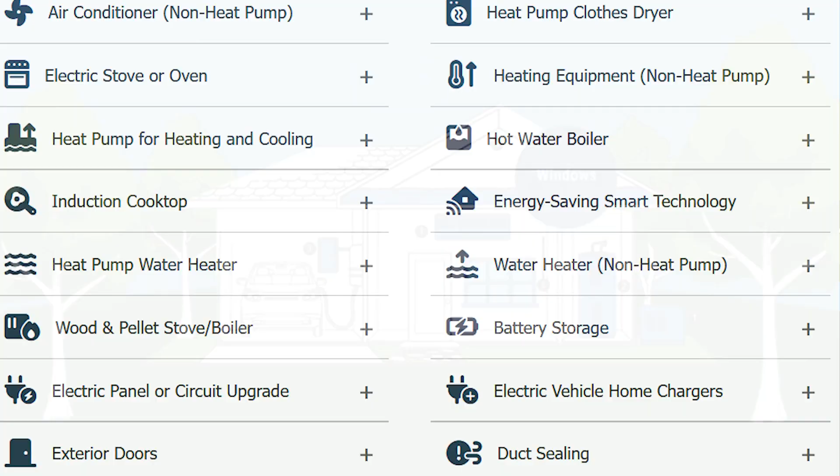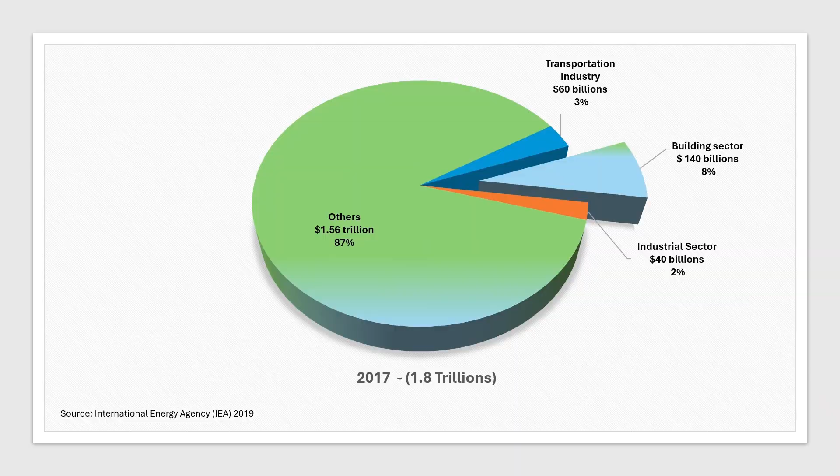The U.S. Congress allocated over $1 trillion to energize the renewable energy industry by investing in energy supply chains, emissions reduction, consumer energy savings, and clean energy jobs. This is in addition to the $1.8 trillion passed in 2017 as part of the Clean Energy for America Act. A sizable amount of these two massive budgets is allocated towards energy efficiency in the residential and small business sectors.

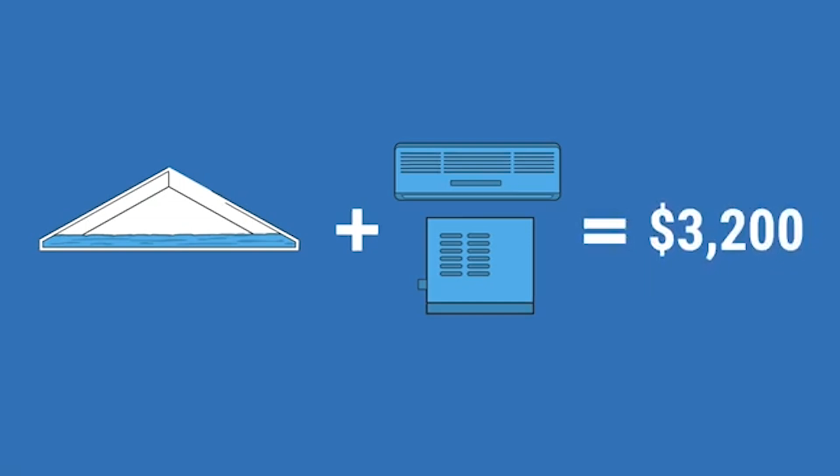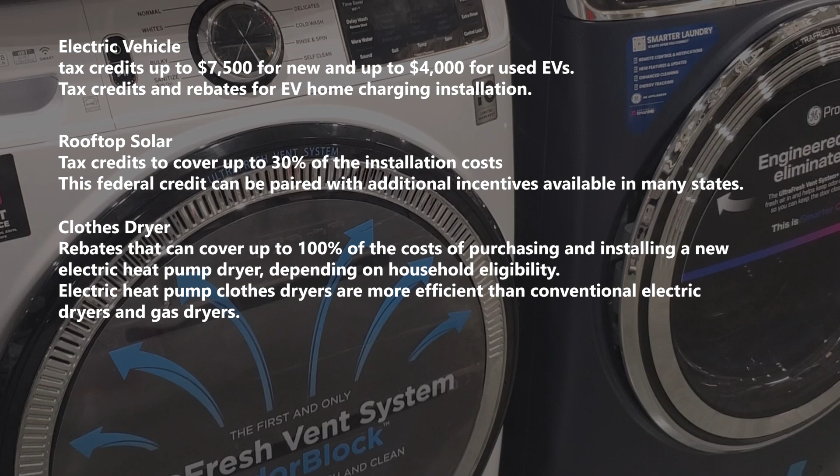Some of the incentives include tax credits of up to $7,500 for new and up to $4,000 for used electric vehicles, as well as incentives for installation of home charging units. Tax credits to cover up to 30% of solar panel installation costs. Rebates that can cover up to 100% of the cost of purchasing and installing a new electric heat pump dryer. These units are more efficient than conventional electric dryers and gas dryers.

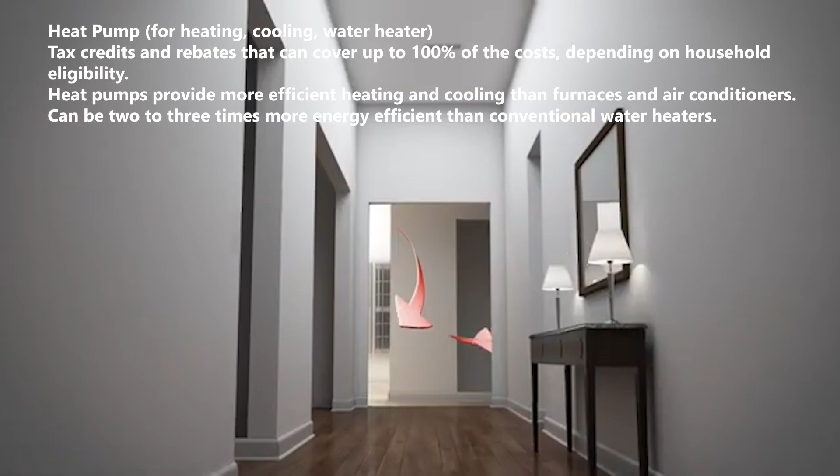Rebates that can cover up to 100% of the cost of electric stoves, cooktops, ranges, and ovens, as well as tax credits and rebates to cover the cost of heat pumps for heating and cooling and water heaters. Heat pumps provide more efficient heating and cooling than furnaces and air conditioners. They are also 2 to 3 times more energy efficient than conventional water heaters.

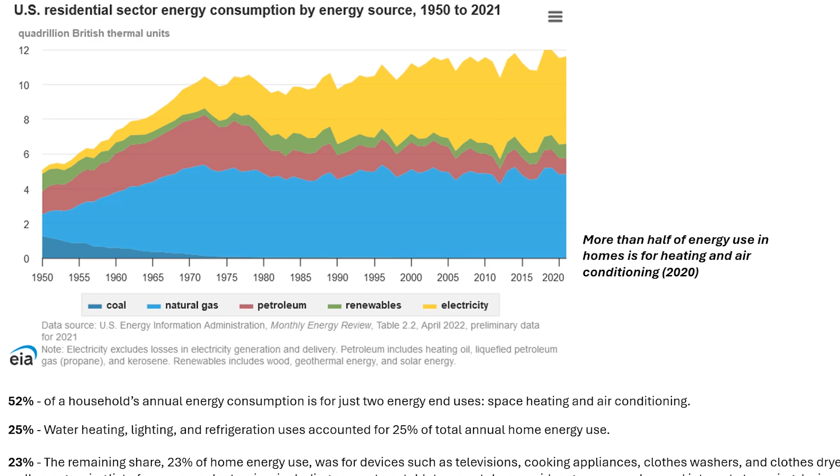Additional incentives include up to 30% credit for the purchase and installation costs of solar water heaters, battery storage systems, small wind turbines, and geothermal heat pumps. According to a 2022 report by the Energy Information Administration, more than half of energy use in the residential sector is for heating and air conditioning. Therefore, the focus of this video will be on achieving energy efficiency in the heating and cooling of our homes and saving on our utility bills.

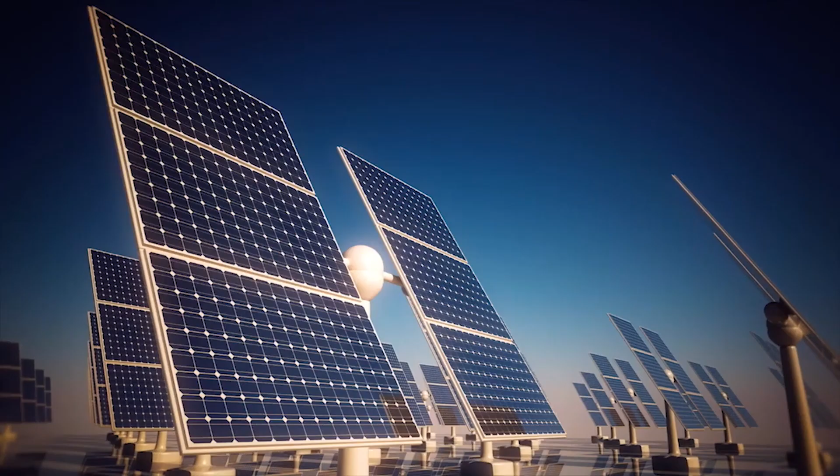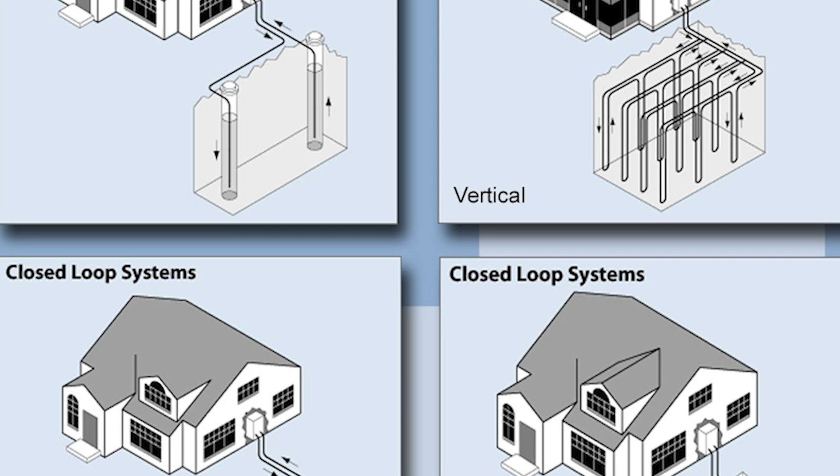This can be accomplished in 2 different ways: passive solar design and active solar design. Active solar design requires large upfront costs such as solar panels, geothermal heat pumps, and small-scale wind turbines, and we will cover this section in our upcoming video. This video will focus on achieving energy efficiency with minimal upfront costs using a method known as passive solar design. This method is implemented using some basic knowledge of earth science combined with time-tested techniques and affordable products. The upfront cost is low, and the impact is immediate and long-lasting.

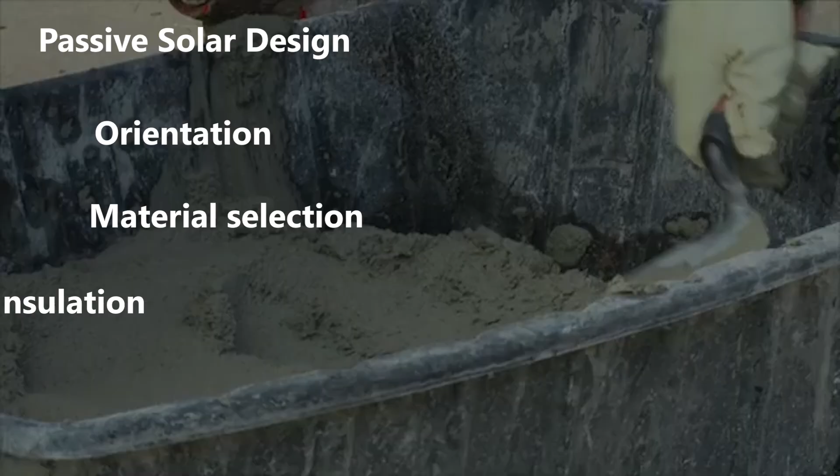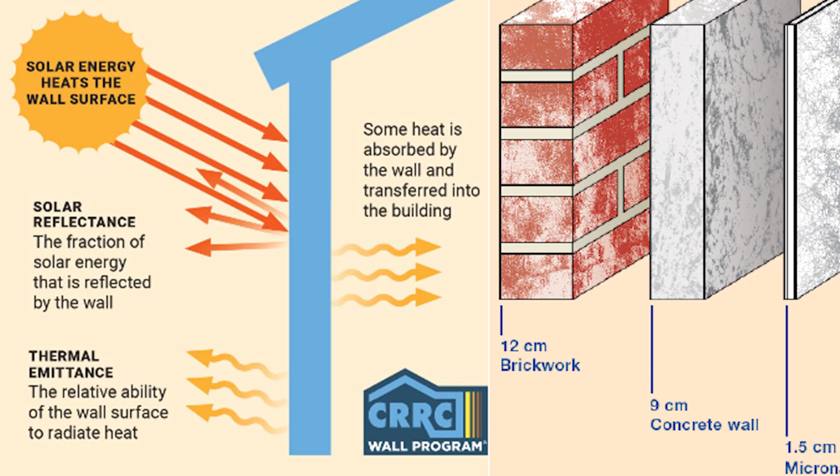Passive solar design incorporates building orientation, material selection, insulation, and weatherization methods to reduce energy consumption and keep our homes and businesses warmer in the winter and cooler in the summer. During the summer seasons, our efforts are concentrated on blocking the sun's energy to keep our homes cool. This is known as passive solar cooling.

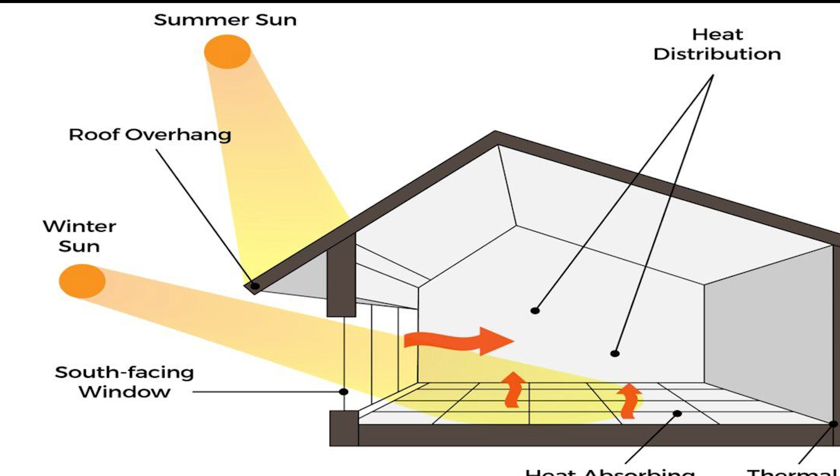One of the simplest, most affordable, and most effective ways of accomplishing the task is using overhangs. Since the sun's path follows a high arc during summer, roof overhangs are very effective in blocking the sun's rays. During winter, when the sun's heat is needed, overhangs do not pose a problem since the sun follows a lower arc path, so natural light and heat can reach our homes. Blinds are also another simple and time-tested product that contribute to a more regulated interior temperature.

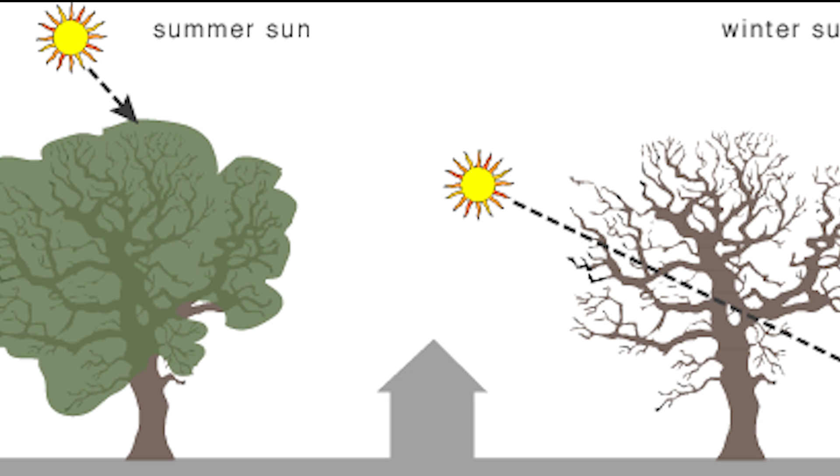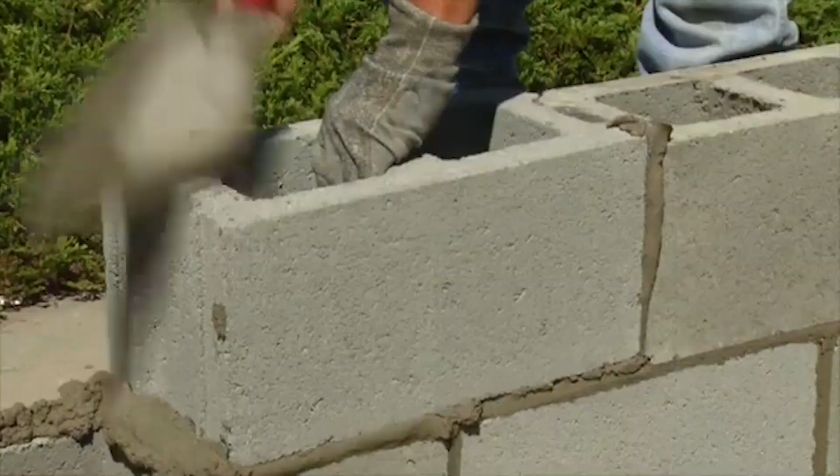Finally, trees and plants that thrive in summer and lose their leaves in winter are a great addition to the energy savings package. They block out direct sunlight in the warmer months while allowing sunlight to reach our homes in winter. It's a smart choice for boosting both energy efficiency and visual appeal. The most passively effective means of keeping our homes cool during hot summer days is by using the right building materials during new construction or when modifying existing buildings.

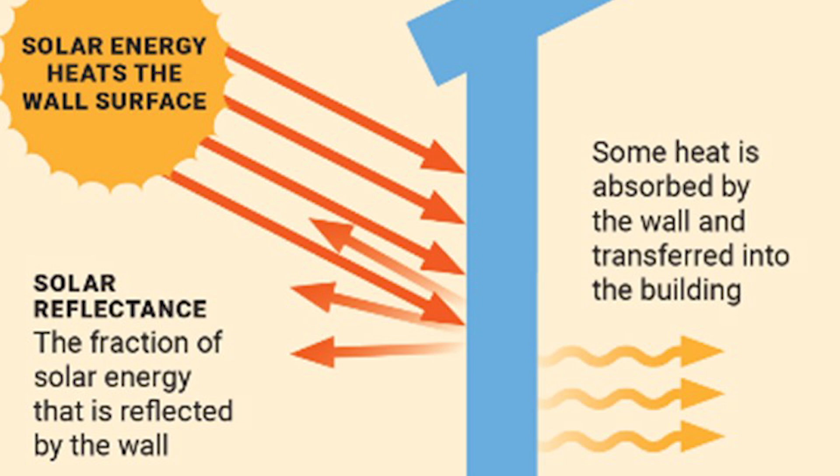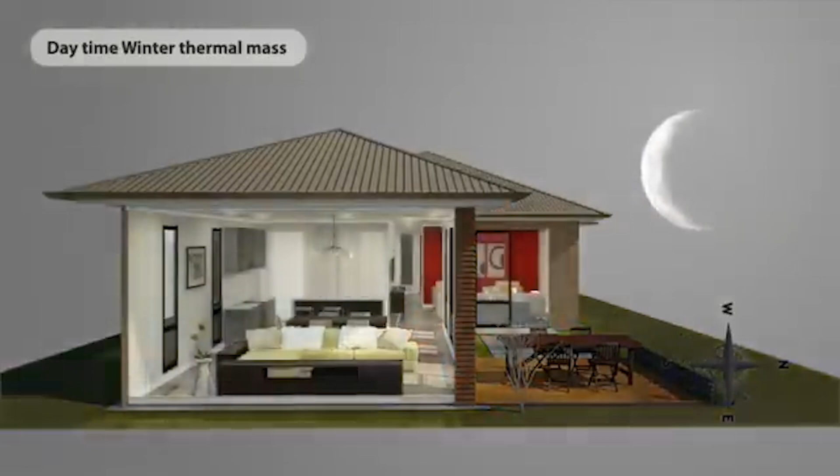Building materials with high thermal mass, which is the capacity to absorb energy, contribute to a cooler interior temperature because they absorb the sun's energy rather than transferring it to the interior. The absorbed energy is eventually released into the interior hours later in the evening or at night, providing a warmer interior when temperatures would have dropped. These building materials help us regulate interior temperature by keeping it cool during the day and warm in the evening when needed.

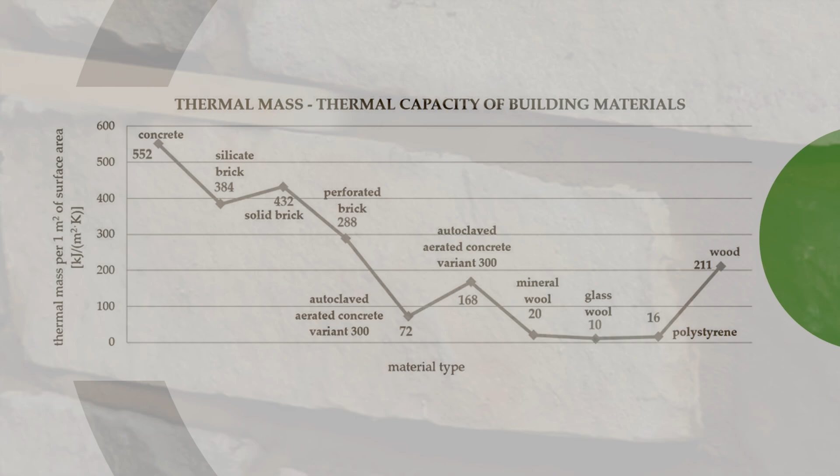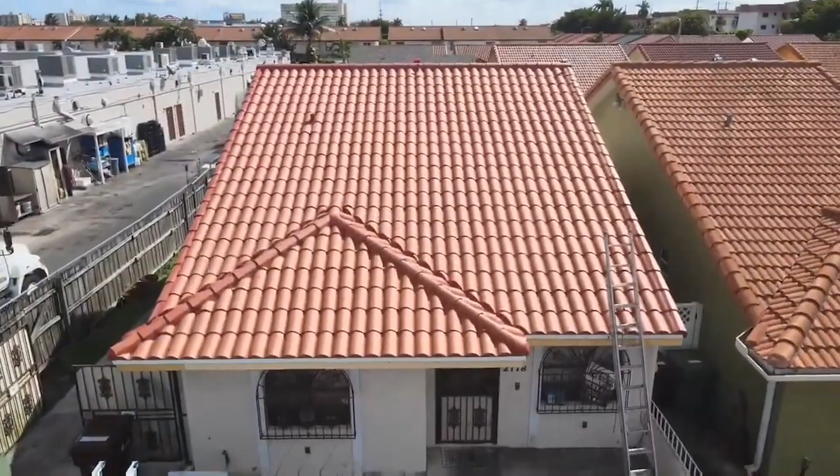Thermal mass is formulated using heat capacity and density. Heat capacity is the amount of heat energy required to change the temperature of an object. For example, it takes a lot of heat energy to change the temperature of concrete or clay compared to metal. Therefore, building blocks made from concrete or clay have higher heat capacity than metal and are more desirable for passive solar design. In addition, their compact mass or density allows them to absorb much of the incoming heat.

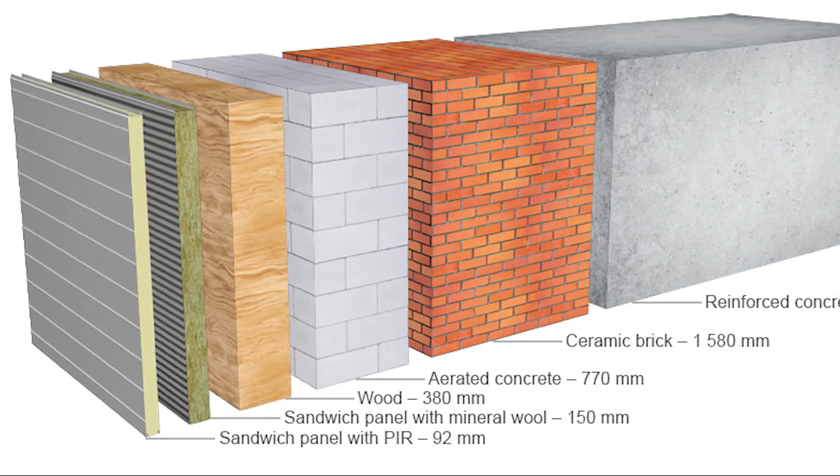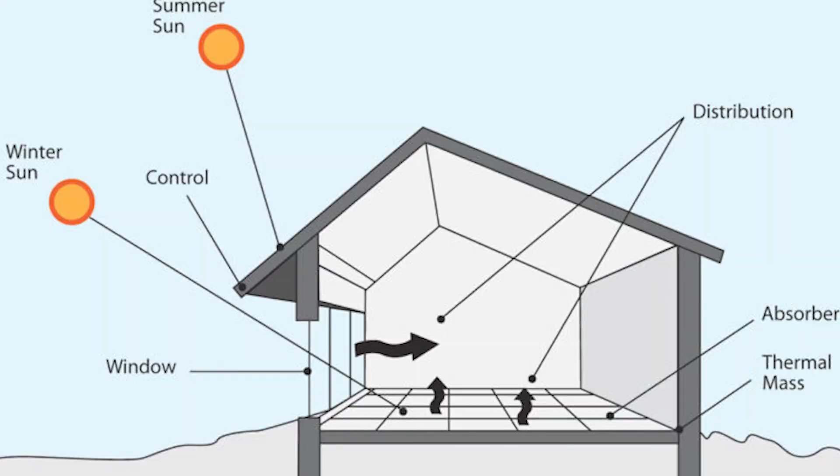These materials are costly, so they are normally applied during new construction. However, they can be applied for flooring of existing buildings at a more reasonable cost for energy efficiency. When the sun's energy enters a living space through doors or windows, the energy strikes the floor at an angle. Depending on the floor material, the energy will either be absorbed or dispersed into the home.

Tiles made of earthy material, such as clay or concrete, are the preferred choices because they have an excellent thermal mass and can absorb the heat that enters the home and help keep the space cool during the day. The absorbed heat is gradually released during the evening when most needed. Building materials for passive solar design are ranked according to their thermal mass. The higher the ranking, the more desirable the material.

Material selection is a method that has been passed down for generations. For centuries, many cultures around the world have used materials with high thermal mass, mainly earthy materials, for similar cooling purposes.

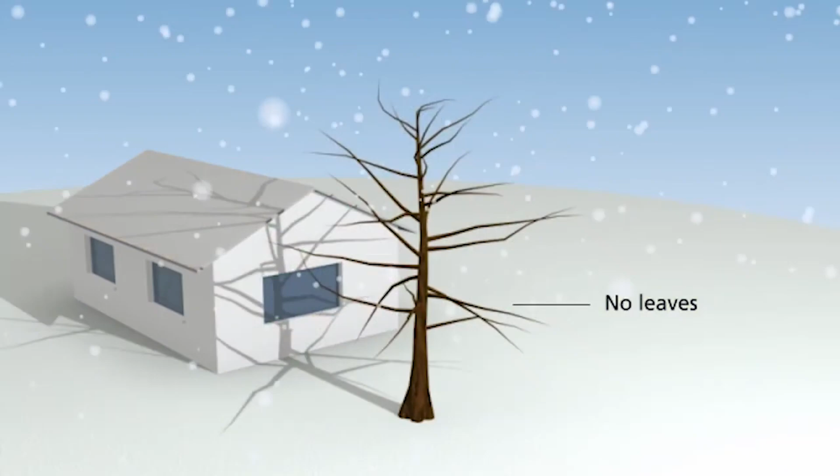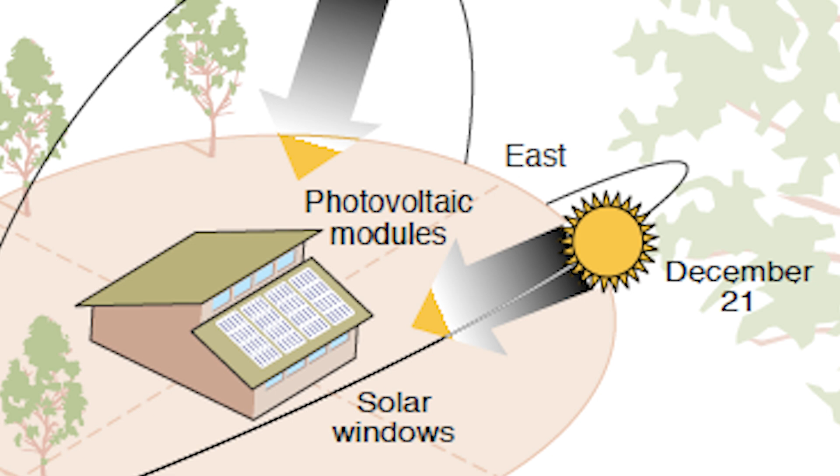Winter brings its own set of challenges. This time, the goal for energy efficiency is to allow as much of the sun's energy as possible into our homes. This is accomplished using passive solar heating, which is a method of orienting openings, such as doors, windows, and skylights, to face the sun. Homes reoriented toward the sun have proven to save between 10% and 20%, and the IRA provides tax breaks and rebates for upgrades of exterior windows, doors, and skylights.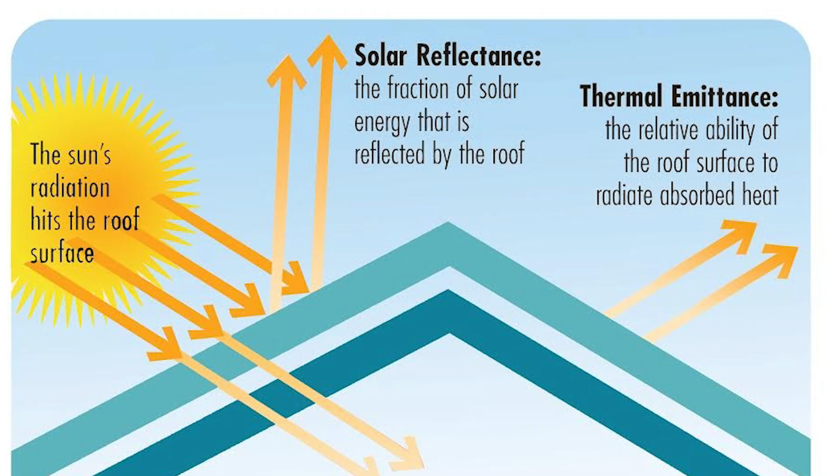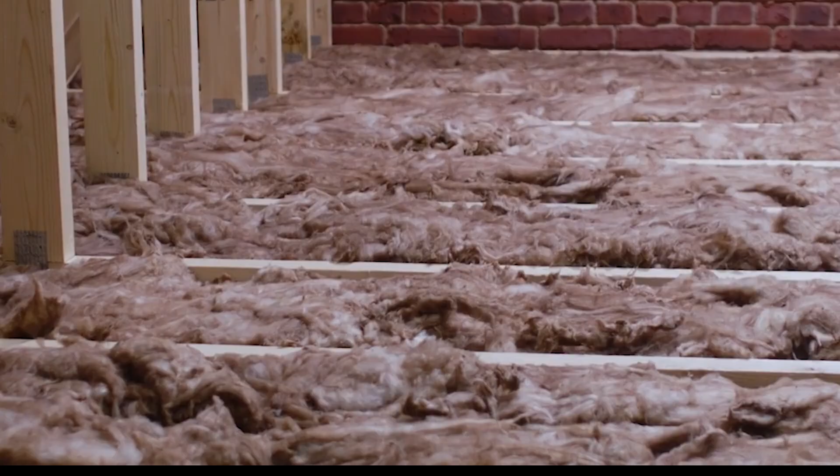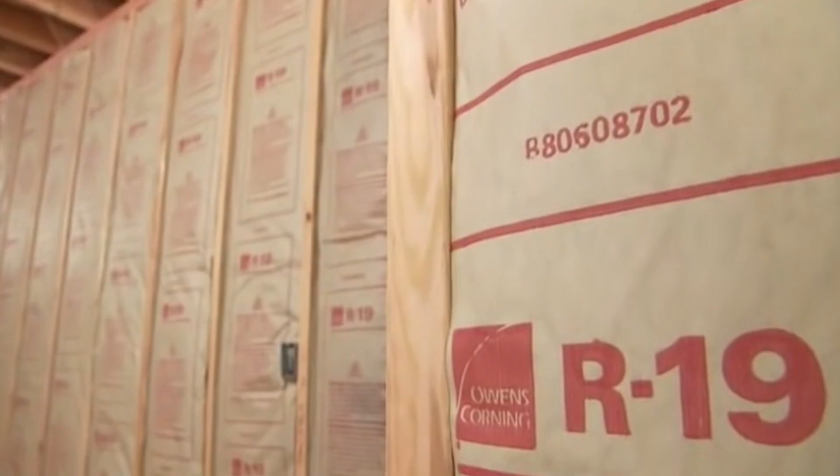Once passive solar design is implemented, the next task is to limit the amount of heat that flows in and out of the home and keep the indoor temperature as consistent as possible. This is accomplished using insulation, which helps reduce heating and cooling costs. Insulation can be applied either during new construction or on existing buildings. Insulation levels are specified by the R value, which is a measure of the insulation's ability to resist heat flow. The higher the R value, the better the thermal performance.

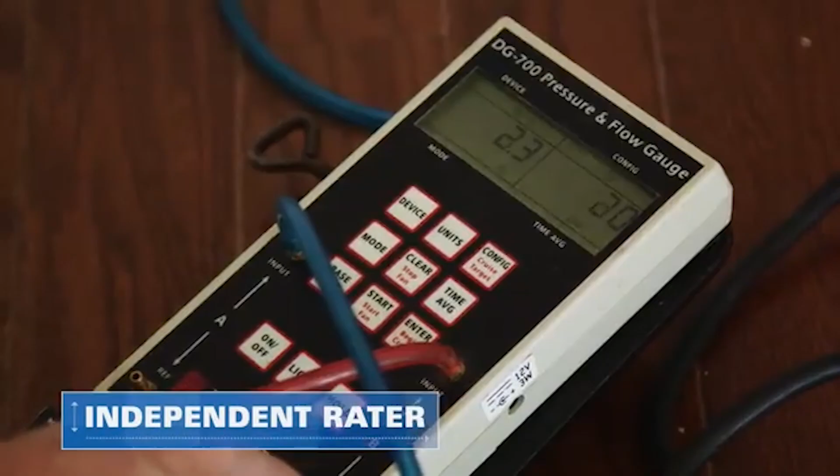Finally, detecting and measuring air leakage is the last step to an energy-efficient home. Air leakage occurs when outside air enters, and interior heated or air-conditioned air leaves the home through cracks and openings. Detection can be accomplished visually or with measuring devices.

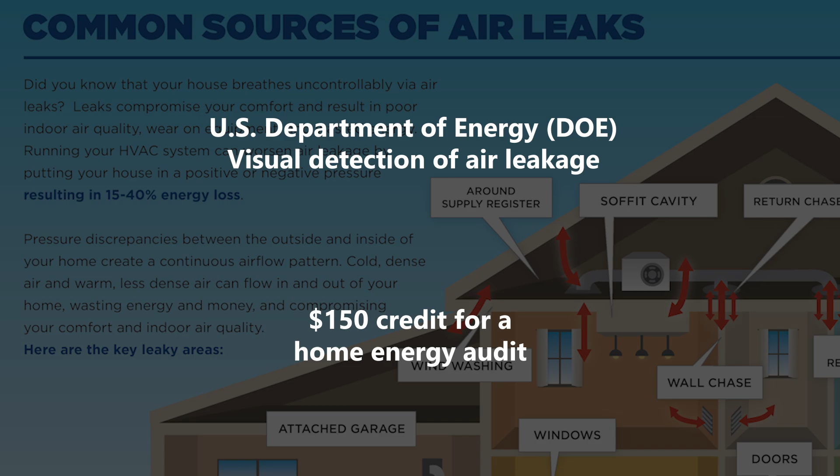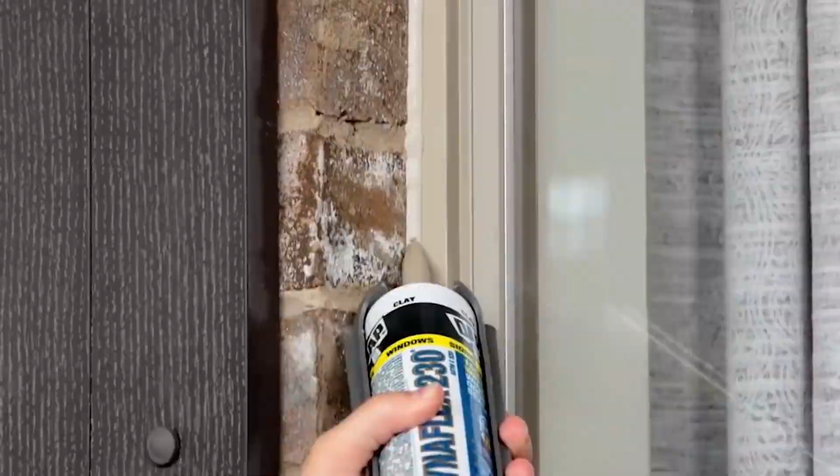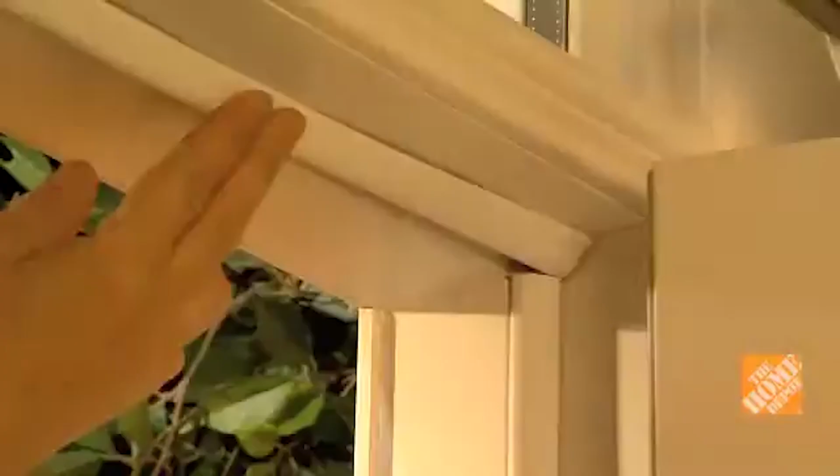Once air leak areas are identified, caulking and weather stripping are two simple and effective air sealing techniques that offer quick returns on investment. Caulking is used for cracks and openings between stationary house components, such as around door and window frames. On the other hand, weather stripping is used to seal components that move, such as doors and operable windows. After all, windows can be responsible for 25 to 30% of heating and cooling energy use, and doors can leak significant amounts of energy as well. Again, the IRA provides financial incentives for these upgrades.

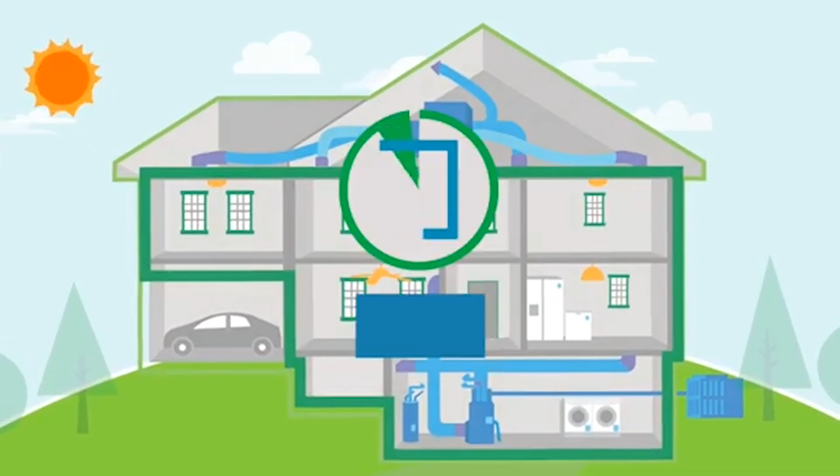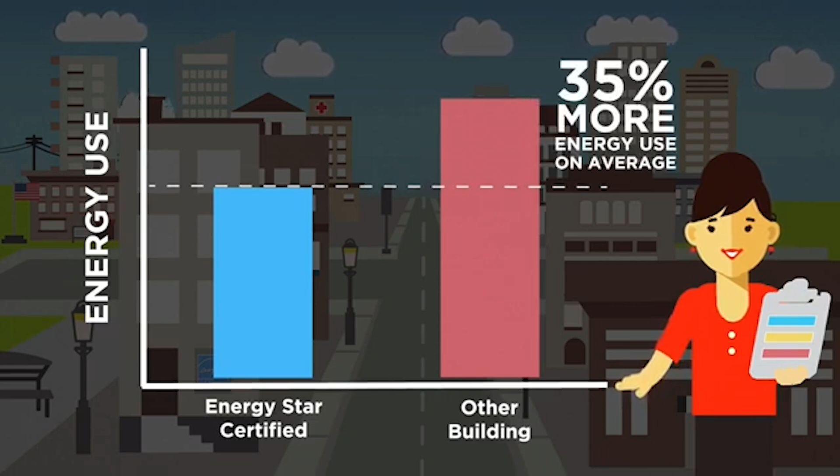Today, many architects and home builders are incorporating time-tested methods of orientation and material selection, along with modern construction materials, into modern home designs to reduce energy consumption and expenses. The U.S. Department of Energy estimates that over 2 million energy-efficient new homes and apartments, known as Energy Star certified, have been built to date. Over 2,800 builders, developers, and manufactured housing plants are Energy Star partners, including the nation's 20 largest home builders. Existing buildings can also meet Energy Star certification by adding efficiency products such as insulation, windows, and doors.

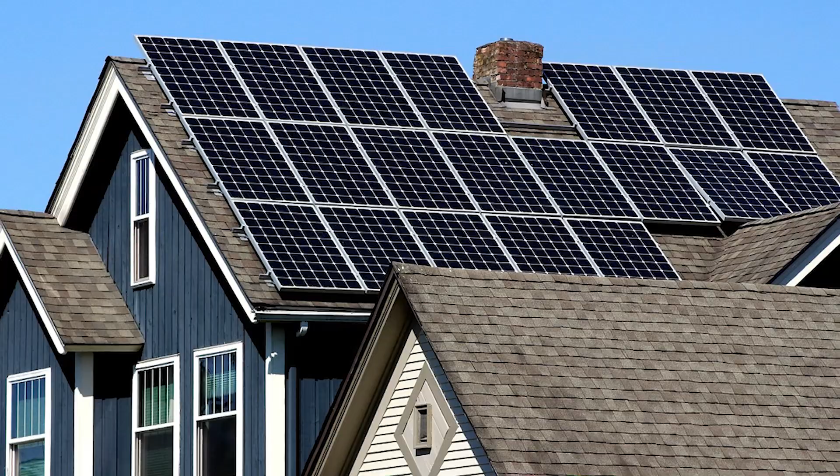In our upcoming video, we will look at energy efficiency and savings using active solar design, which includes solar panels, ground geothermal, small-scale turbines, water heaters, and others, including Energy Star appliances and LEDs.